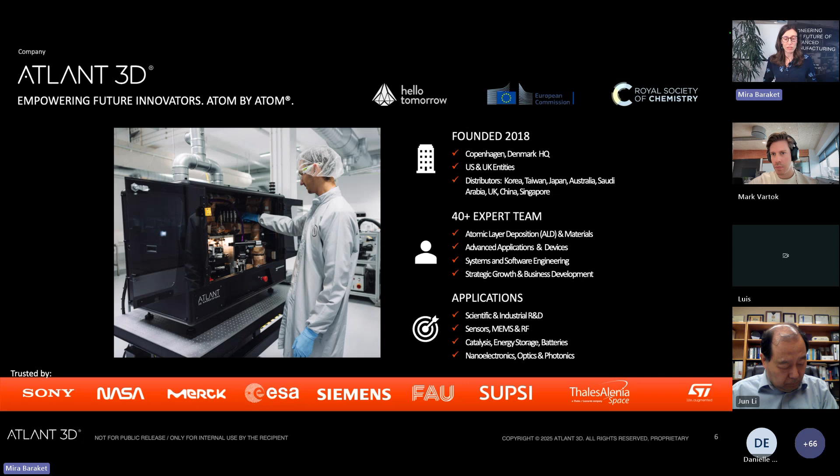We are a team of 40 people. We have expertise mainly in material science and more specifically in atomic layer deposition. We also have a team targeting and focusing on many applications—so we have expertise in areas like optics, photonics, microelectronics, and sensors. Also, we have a team of software engineers and system engineers working on producing our products, and of course, we have a sales team, a business development team, and a strategic growth team.

So what is ALD, and how? What is DALP and where does it come from? I'm going to start by talking a bit about atomic layer deposition. Our technology is based on ALD, which was invented in the 60s and 70s, and this technology is based on the reaction of two gases—it's a deposition technique where you have to meet two different gases to create layers of material.

The technique is very conformal and produces high quality film only because the way we are meeting those two gases, or the interaction, is happening on the surface. So instead of having the gases meet in gas phase, you go through a sequential pulse process that enables the deposition or reaction to happen on the surface. The way it works: you send your first gas onto your substrate, and then before you send the second gas, or reactant, you have to go through a purging process that enables the cleaning of the process chamber.

So if you were to go through the process one by one, you send gas one, then you would have a pulse or a purging process.

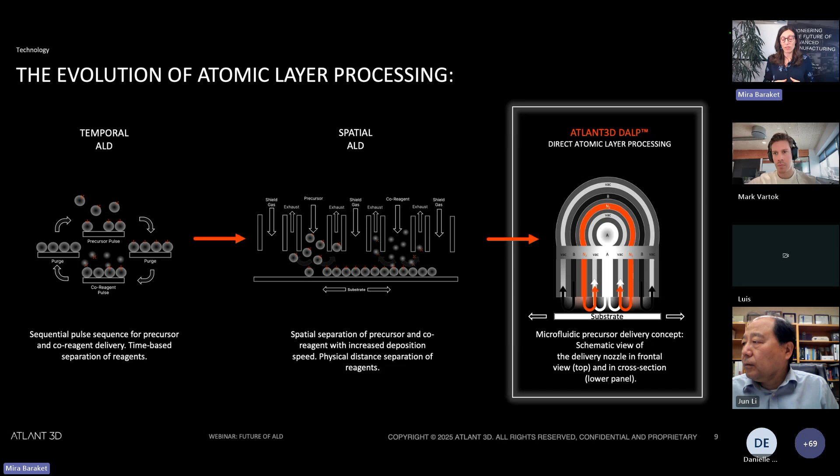What's different from spatial ALD is that now we are having the process localized partially on the surface. So you can enable processing for like direct patterning or direct processing on your surface.

And the way we do this is through our micro nozzle that you can see here on this slide. So our micro nozzle is customizable and it's scalable.

So you are able to change the size of the nozzle, but also to change its geometry depending on the application that you are looking for, and depending on the size of the pattern that you are looking to deposit.

So our technology, or this micro nozzle, has been patented, and we do have several patents already granted across the world, and we are constantly working on

protecting our technology, either on the micro nozzle side, but also on some application side. So we are constantly working on that

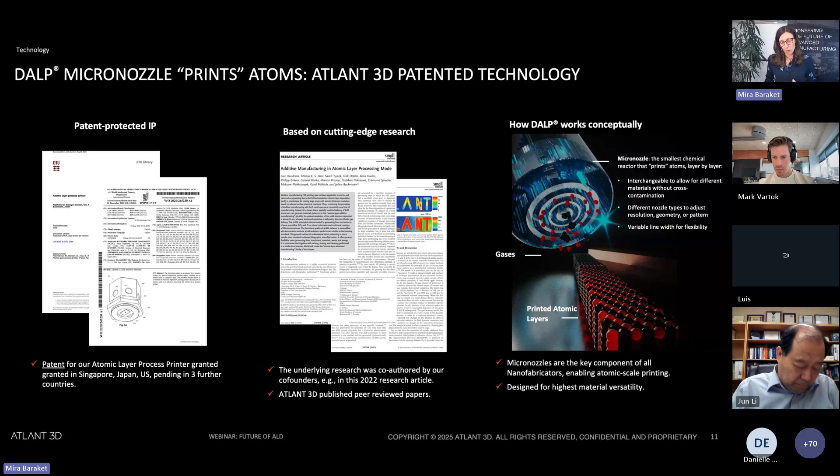on application of patents as well.

So the reason we have come up with this solution is if you were to think about the traditional lithography-based micro and nanotechnology processes, this would have to go through a very lengthy process that has hindered a lot of the innovation cycles, or has hindered the innovation cycle from being fast.

You go through the different exposure steps and development, and then you have to reiterate through all these processes.

So these processes are usually done with different machines in the clean room, and so you have to toggle between the different machines, but also the different processing techniques.

So what this means is that you have to have a very expensive capex and opex, and also because of the high need of these different processes and the skills that are needed

to go through all of these processes. This means that the innovation cycle is very slow, and there is a limited number of materials and processes that you

So what we are bringing with our technology is not only about deposition, but it is also allowing us to enable locally multiple modes of processing.

You've heard me talk about ALD at the beginning, but when we talk about DALP, we are talking about different processing techniques. So not only deposition, but also etching, doping, and cleaning.

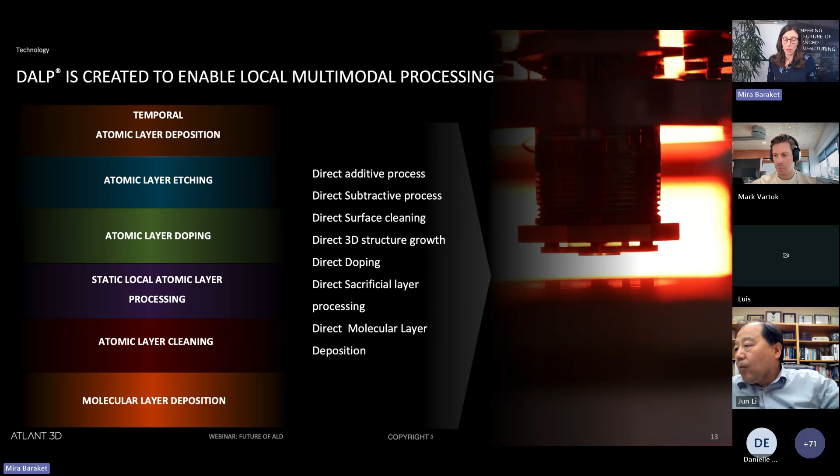So what this means is that now with one tool, and with one micronozzle, you are able to have direct additive or subtractive processing techniques, but also direct doping and direct deposition or structure, 3D structure growth.

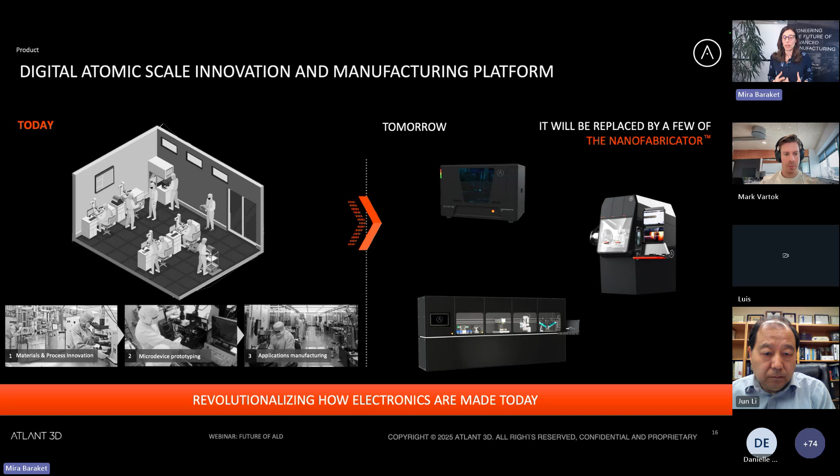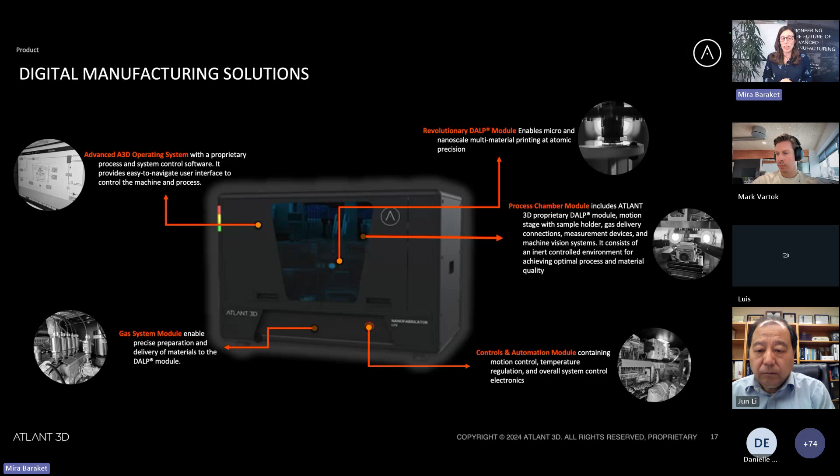As you've heard me talk about the different modes of processing, instead of using the different microfabrication techniques and processes usually used with photolithography steps or standard processing techniques, now we are enabling all of these processes in one tool. I'd like to talk to you today about our Nanofabricator Light, which contains our DALP module, and with the different automation, controls, and gas system, we are enabling an easy way of digital manufacturing.

So what does this mean? With one tool, all you have to think about, or most of the time you will spend, is on the design of experiment. You would start by bringing the design you'd like to print or process, then prepare your nanofabricator by filling the materials and loading the samples, and after that go through the definition and design of the parameters.

We have software in our nanofabricator that allows you to import your CAD design, and you'll be able to see and simulate how the output would look. Through that process, you can still do edits and refine your parameters and the position of the processing you're going through. Then you launch your job, and once it's done, you'll end up with either a material, a process, or a device that is already fabricated using our tool.

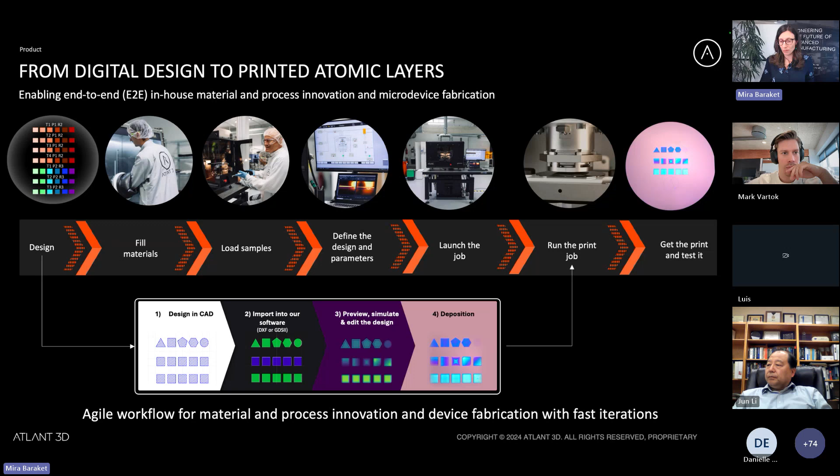So the technology is not only about device fabrication or prototyping. It actually enables a lab-to-fab approach across the whole value chain. You can think about accelerating materials and process innovation, or enable micro device prototyping, but also manufacturing. We have targeted our product roadmap so you can enable application manufacturing platforms designated for your specific application.

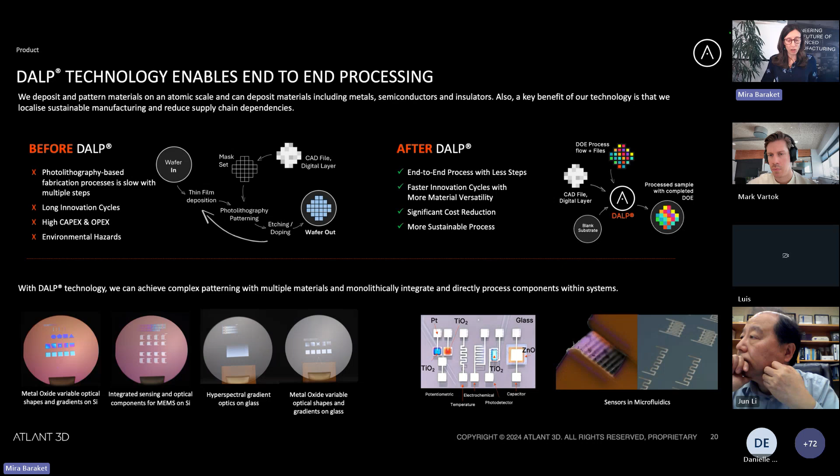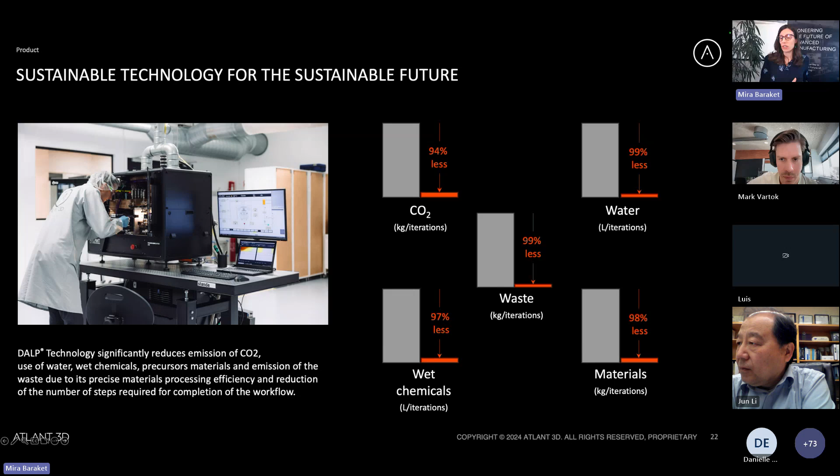In terms of sustainability, we are also reducing waste. One main reason is that we are eliminating the lithography and post-processing steps with our direct patterning approach. Our nanofabricator system possesses a unique gas system that allows us to supply only a small amount of the precursors - this is one of our know-hows - as opposed to traditional ALD, which requires a much higher volume of precursors.

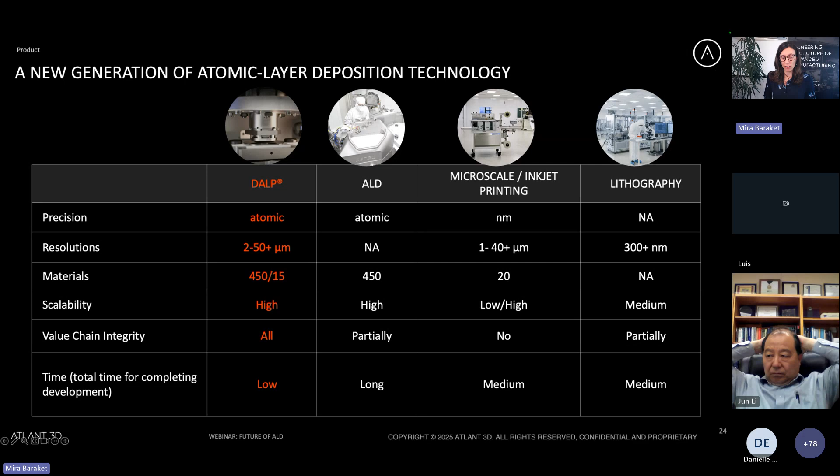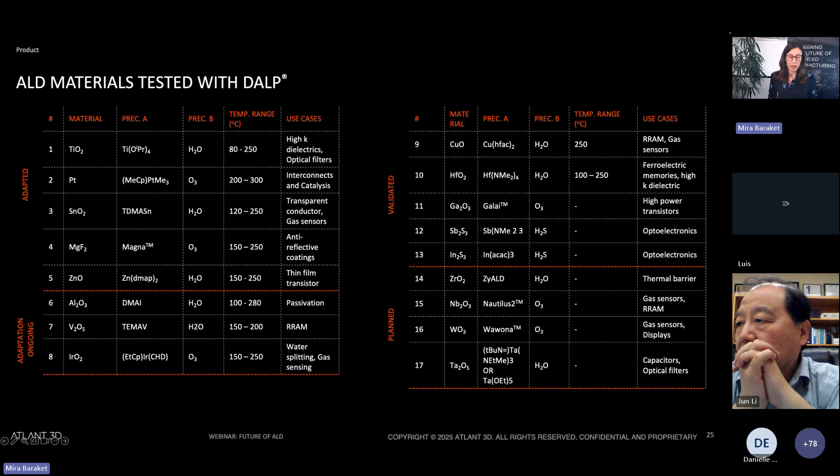So in practice, what materials can we deposit with direct atomic layer processing with our technology? We have so far tested many materials, mainly oxides and metals. I would cite specifically platinum, titanium oxide, tin oxide, zinc oxide, and aluminum oxide. We are constantly working on introducing much more materials into our validation process, and I'd like to mention that we have already validated sulfides and fluorides, and we are constantly improving the technology. So we will soon have an upcoming process that will enable us to also bring nitrides to the list of materials, among others, and I'll be talking more about those in a few slides.

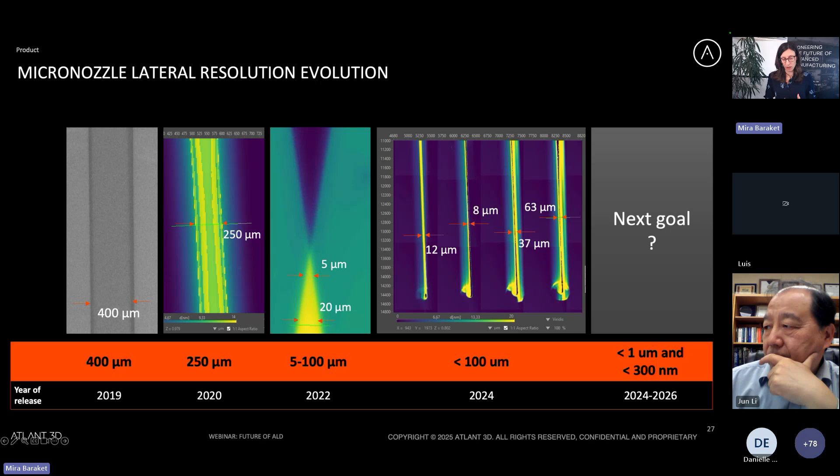And recently, we had a breakthrough in our technology, where we were able to introduce a new nozzle type that will allow you to have a variable line width with one same nozzle. So what this means is that you can also create your patterns, and you can have different line widths of your patterns on the same wafer, using the same micro nozzle. We are constantly working on improving our resolution, and we are confident it will allow us to go beyond the 1 micron resolution.

So what does it mean? What it means also, if we are able to directly pattern on a surface, it's not only that you can create a device with multi-materials, but also you have now a new way of surface structuration. Here is an example of 3 different types of structures that are created because of the direct deposition method or direct processing, either by the deposition or etching, and I will talk about that in a bit.

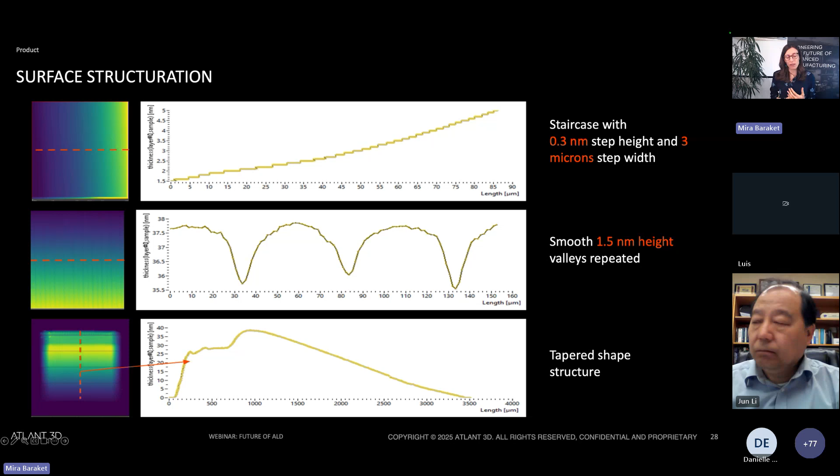On the top here, it's a staircase that has been created with 0.3 nanometer step height and with a 3 micron step width. In the middle, this is a few valleys that have been repeated with 1.5 nanometer of height. And on the bottom here, this is a structure that is very hard to be done using standard methods of manufacturing. So we have created a tapered shaped structure.

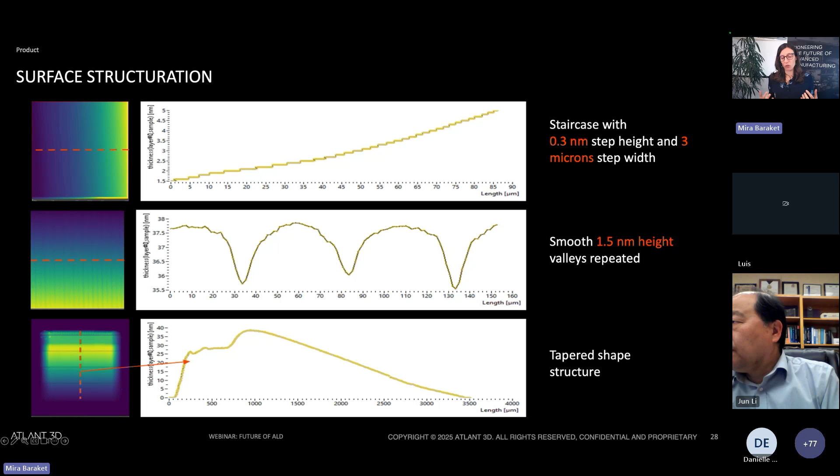This is a structure that is done with multiple thicknesses. If you were to think about doing this using your normal deposition techniques or your normal processing techniques, this would be very long to do, or if not impossible. So with our technique, we also work on the alignment and precision and the uniformity of our deposits.

Since we are creating some devices, this means that the deposition can sometimes be done in alignment with other pre-existing patterns. That's why it's very important to have an accurate alignment, and we are able to achieve an accuracy of 1 micrometer.

In terms of precision and repeatability of our deposition process, we constantly have processes and continuous quality control, and we are able to get to a deviation of the process as low as 1%. Of course, this is dependent on what material you are depositing, what substrate you are depositing on, and the nozzles that you are using. So these numbers are only for one material with one same nozzle used all at the same time.

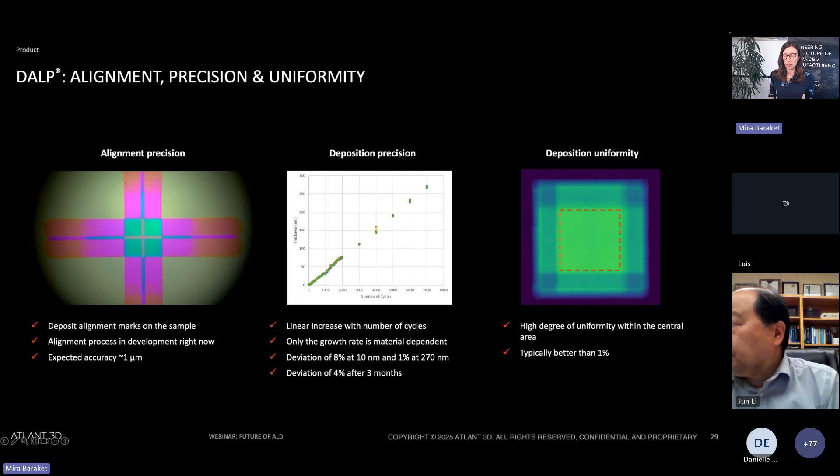In terms of the material uniformity, we have a high degree of uniformity of the deposited material, and we are typically better than 1%. So again, I would like to go back to the DALP process. It's not only about deposition, it's also about etching, about creating ternary materials, and about multi-layering.

In terms of materials, as I've showed you earlier, we have already qualified metals, oxides, sulfides, and fluorides, and we are looking into incorporating more. And I would specify nitrides, which is one important material that we would like to introduce soon. Also on the etching side, we have confirmed and demonstrated etching of zinc oxide and aluminum oxide, and more are to come soon.

We are in the proof of concept phase for making ternary materials, and we are interested in the materials that are listed here: aluminum zinc oxide, lithium niobium oxide, and hafnium zinc oxide. Multi-layering, of course, is inherent to our technology, so it is something that we can do with all available materials. We have already validated titanium oxide and magnesium fluoride, and also more materials that are based on aluminum, platinum, and others.

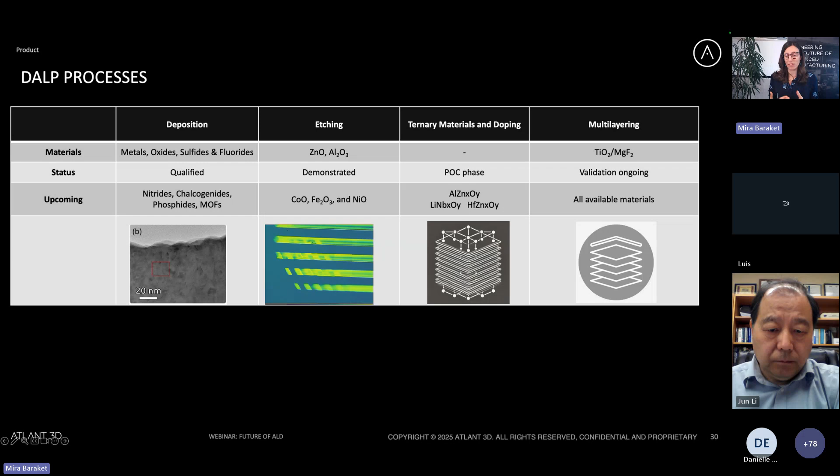So now I'm going to go to the next poll here, and this one is about the selection of thin film processing technologies. Which factor is most important to your business?

Okay, thank you. I will move to the application. Where is our technology used? And I will show you a few use cases. In terms of application, we have a large span of different application interests from different industries, and I can mention in optics and photonics a lot of interest in optical filters and in waveguides.

In microelectronics and power electronics, we have a lot of interest from MEMS and sensors, and also for local passivation and etching in semiconductors and in advanced packaging. And in emerging technologies, I'd like to mention neuromorphic, where we have a very good alignment in terms of the needs and where we are bringing solutions to this particular application.

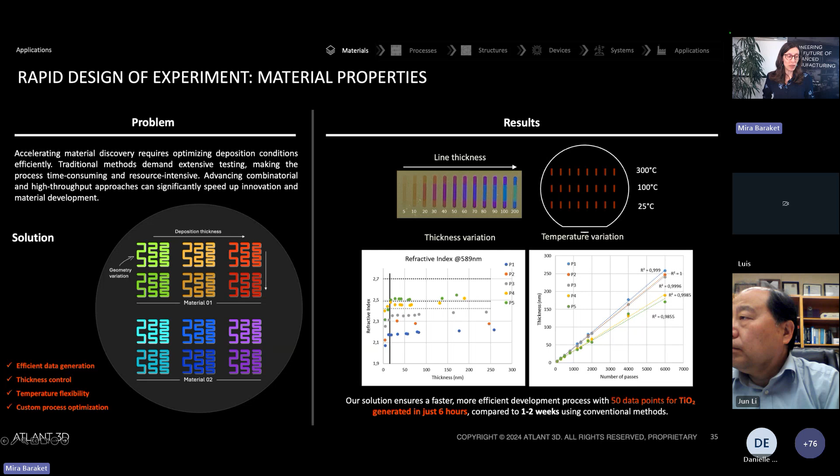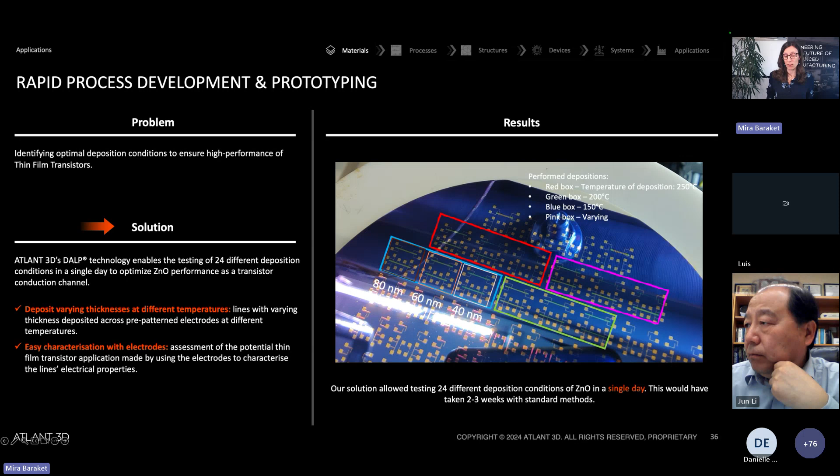So we were able to deposit 24 different deposition conditions of zinc oxide in this case within one single day. So again, if you were to compare and go through normal processing techniques, this would have taken 2 to 3 weeks.

As the technology is based on ALD, conformality is really one of the highest interests in the technology, but not in the same way that it is done usually. So if you were to take ALD, yes, it is very conformal, but if you were to use normal ALD on irregular substrates, on substrates that are not flat, then going through the different processes and techniques for creating patterns would be very troublesome, because those techniques only work well with wafers, but they don't work well when you have corrugated surfaces.

So what we are enabling here is the conformality of the deposition of the coatings, but also selectively depositing on the surface. The examples I am showing you here are for deposition on different types of corrugated materials. On the top left, we are showing anodic aluminum oxide coated with platinum. And on the right here is another structure, a black silicon surface that's coated with platinum.

Also in trenches, this is something that is usually difficult to do with selective deposition using normal techniques. With our technique, you are able to deposit conformally, but also directly in trenches, as can be shown in the two bottom pictures.

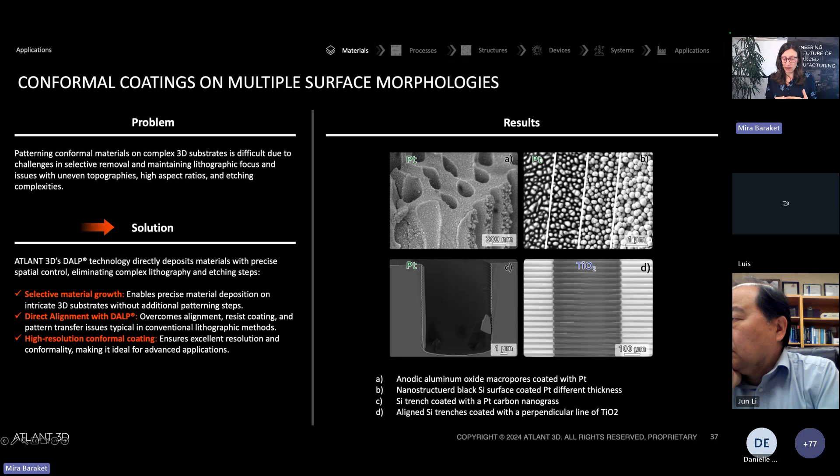So in terms of processes, this example is about local edge passivation. This technique has been used for solar cells, and DALP has been used to passivate the edges and corners of silicon chips. If you were to try to do this process using standard processing techniques, this would be very difficult, and you would struggle with the deposition on the edge of a surface, because you would have to go through the etching of the front and back side of the wafer, and this would be very costly and time consuming.

So in this case, we have shown that we were able to improve the carrier lifetime after the edge passivation only on the surface, and this was done within a few hours of deposition.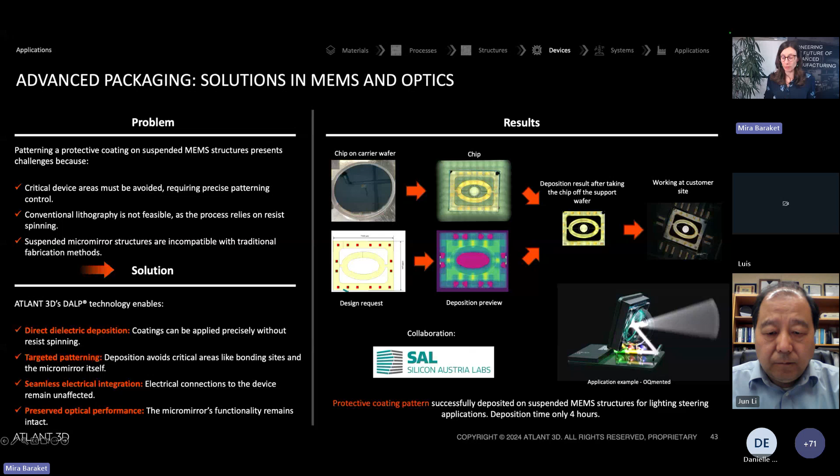So now I will again seek your attention for another question, which is about the next generation manufacturing solution and what preferences you would have.

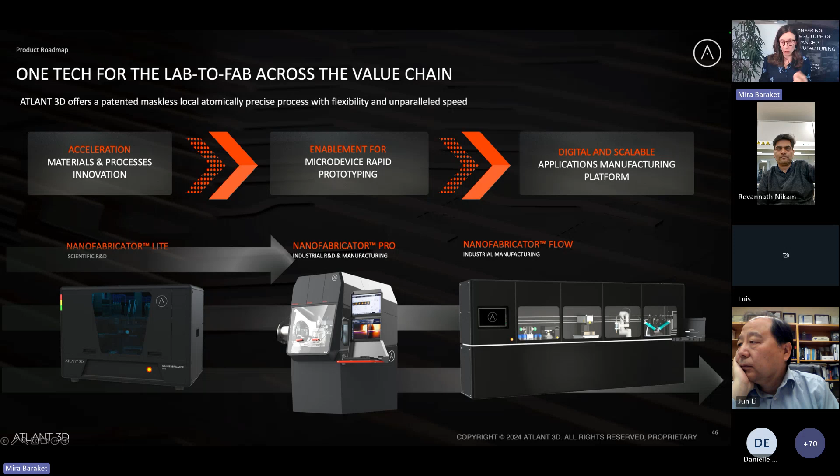Okay, so this brings me to our product roadmap. As I said earlier, our technology is a lab to fab solution across the whole value chain, and we have multiple products in our roadmap that will enable the technology to follow the innovation cycle from material process to prototyping and also to manufacturing platforms. In our roadmap we have different products, and in each of them we are enabling manufacturing for different wafer sizes or coupons.

With the Nanofabricator Lite and the Nanofabricator Pro, we are enabling industrial R&D and small manufacturing production. In the case of the Nanofabricator Pro, we have wafer sizes of 4, 6, and 8 inches. But we are also thinking about the long term. Our Nanofabricator is enabled to be connected with a cluster tool, and this is the case of the Nanofabricator Flow. And in terms of application specific, we have the Nanofabricator Hub, which enables application-focused fabrication where you can combine several digital fabrication and manufacturing tools in the same platform.

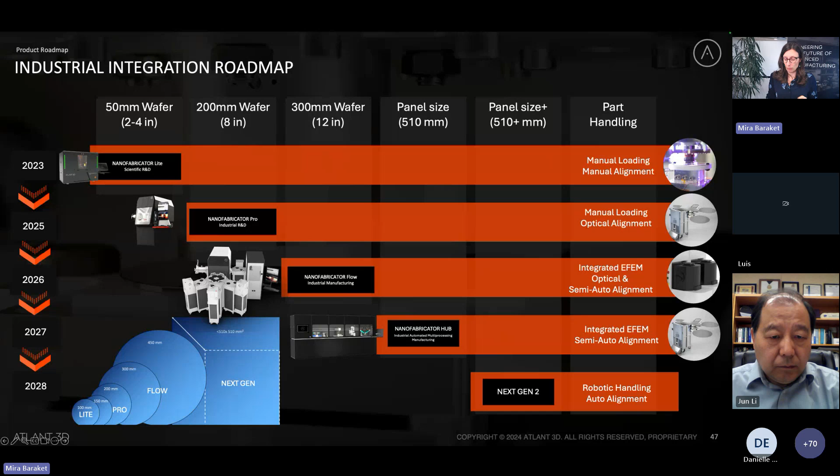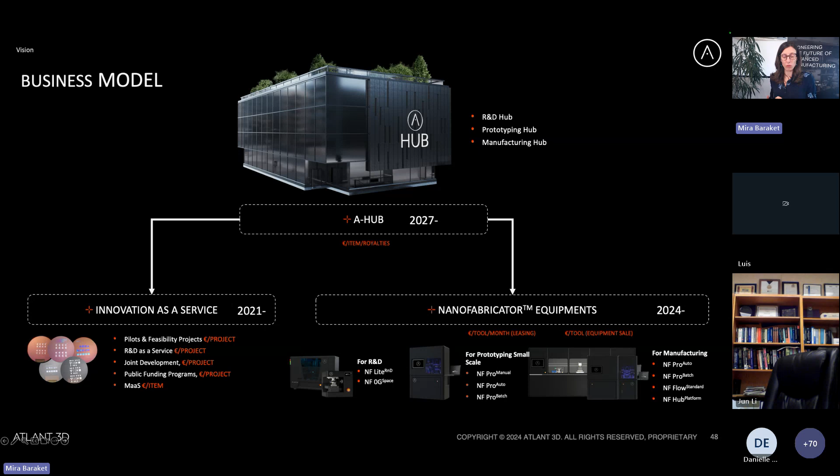In the long term, what we are looking to enable is a faster innovation cycle, and this would only be enabled if we were to create a hub where we have our different manufacturing tools and characterization tools that will enable researchers but also industrials to use the tools from R&D to prototyping up to manufacturing. So this all comes with our vision to drive atomic scale manufacturing.

We are looking to expand the application market with the different products that we are bringing. Our modular platform enables compatibility with other deposition techniques or other processing techniques. And with our hub, we are looking into creating more of an innovation center network.